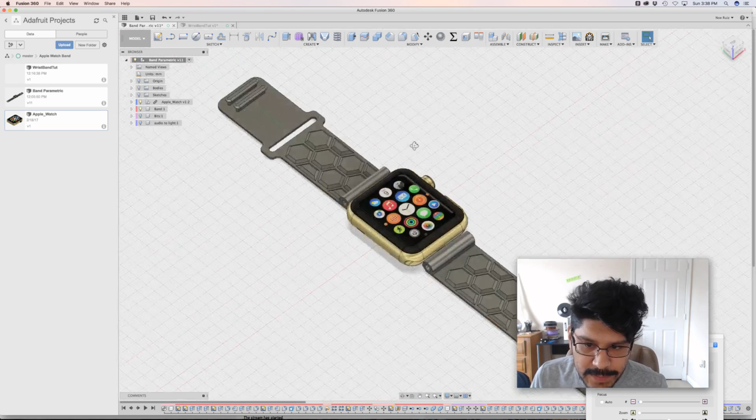So this is what I put together, and I made a couple different versions. I have this band and then this regular band. Oh, this is the one with the little holders for the audio adapter thing. But the main thing is that if I wanted to change, let's flip this out.

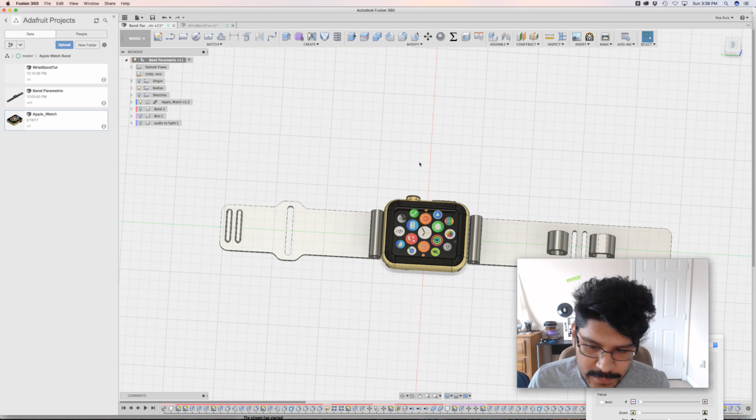If I wanted to change the overall dimensions of it, or even the width of it, it's easy for me to do that. So I'm going to open up the user parameters window, and I have a couple of them here already made. I have the width of the band, so I could change this if I needed to, and everything kind of updates.

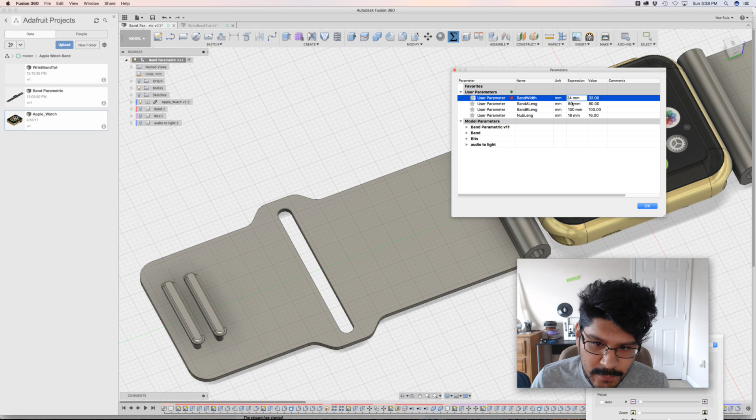If you notice, the nubs stayed, but the little opening for it opened up. So there's a really neat way to do this dynamically.

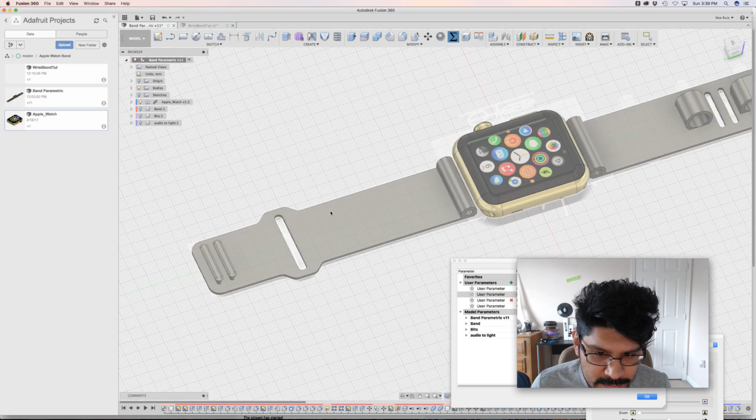The other thing is, I have two parameters set for band A and band B, or you can call it band 1 or band 2. So if I wanted to make this a little bit bigger, let's see if anything breaks. Nope. You can see that it stretched the band out, but it kept the two nubs here in the same distance between this little opening.

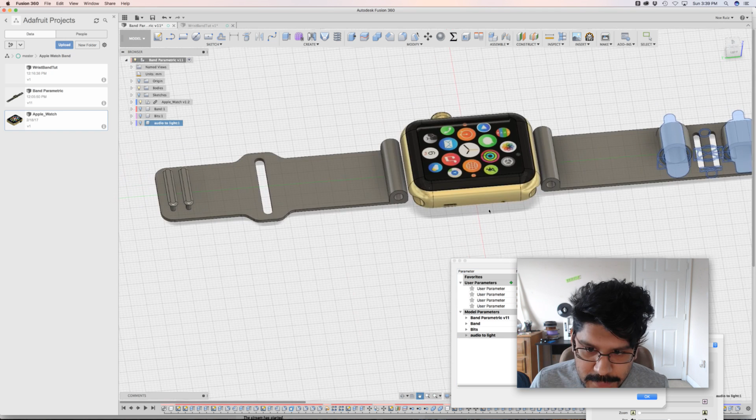So I'm going to show you guys how you can set that up. I think I messed that up. No, it's fine, that's really cool. And I also have it set for this one. This one might break though, because I don't think I added any user parameters for handling constraints on these two guys, so I'm probably not going to mess with that. But for now, this one works really well.

So I want to show you guys how you can build that using user parameters, but more importantly, understanding how constraints work. I've covered it in a couple projects, but it doesn't hurt to cover it again, especially with this project, which is more of a wearable and things like that.

So let's get started. First thing I want to say is that the actual Apple Band, or the Apple Watch thing, I actually found this on the gallery, the Fusion360 Gallery, which is a part of Autodesk's website. So if you go to gallery.autodesk.com/Fusion360, I'll link this below.

There's tons of files and designs that are available for people to check out. I'm kind of new to it, I haven't actually shared anything here yet. I think I'm going to start sharing. But if you're a Fusion360 user, you definitely want to check this site out. It's a lot like the Thingiverse or YouMagine or Pinshape, but these are all designs made in Fusion360.

Some of them are actually available to download. And what's cool about that is you can download this nice model and then take a look at how it was built by stepping through the design timeline. Really cool. You can rework it and use it in your projects, I suppose, depending on if there's any licenses or whatever.

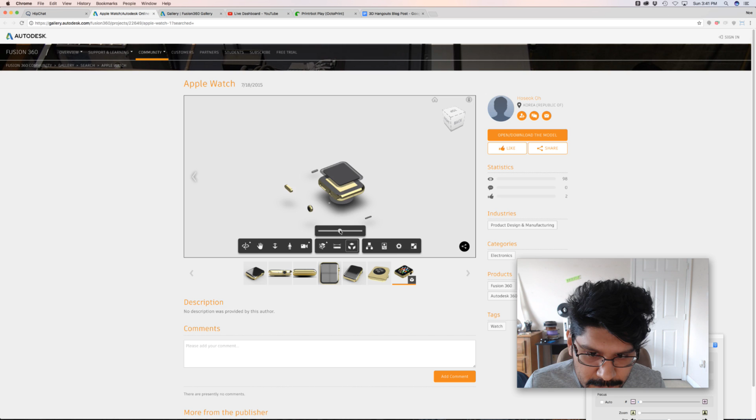This one was made by Hose from Korea, so shout out to you, sir, for making this. I didn't have to use that in the design, but it kind of helps to show it like this. Maybe you want to render it out or something like that. Really nice model, a lot more detail than I would have done, but if it's available out there and you want to use it in your project, check out the Fusion360 Gallery.

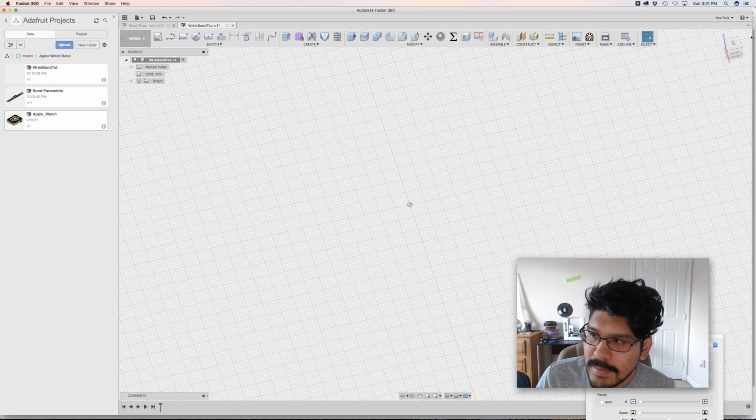So I have this new design file and I always want to save it out, make sure you're capturing the design history. You can right click on your main assembly in the browser and make sure you're capturing the design history.

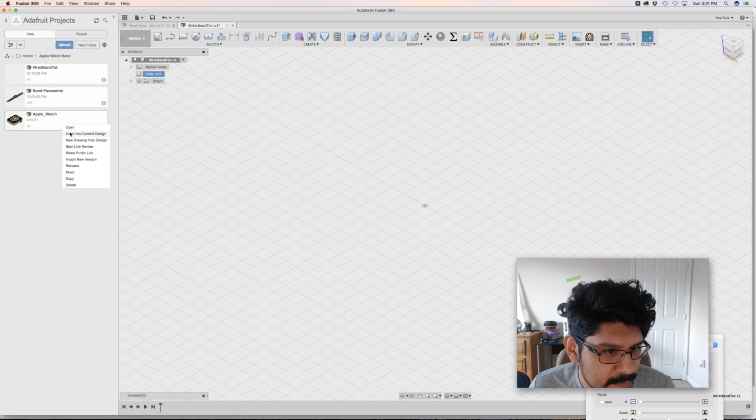And then you have your little timeline at the bottom, so always want to make sure you have that set up. Save it out and then you can import it. So I uploaded this to this project folder - it was a Fusion 360 archive, so now I'm just going to insert it into the document. It was designed for the center grid, so I don't have to really place it anywhere, it's already in a good spot.

So I'll start drawing out some stuff. Next thing I want to do is probably always make a new component for making stuff, so I'm going to call this wristband.

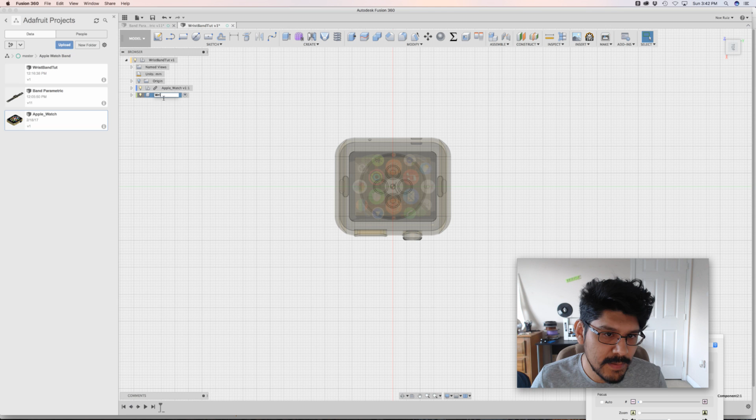Yeah, just wanted to make sure audio and stuff was working.

Okay, so now that I got that going on, I will start with some user parameters. It's under the modify window here, but I have it saved up here in the toolbar so I can quickly get to it. I already made some, so I'm going to delete these and remake them. The way you make them is you start off with this - there's nothing here yet. You can hit the little green plus sign, and then you can add your name to it. So this one's going to be band width.

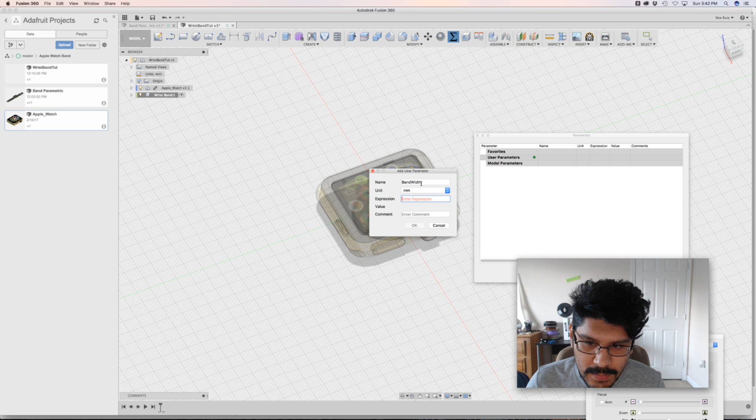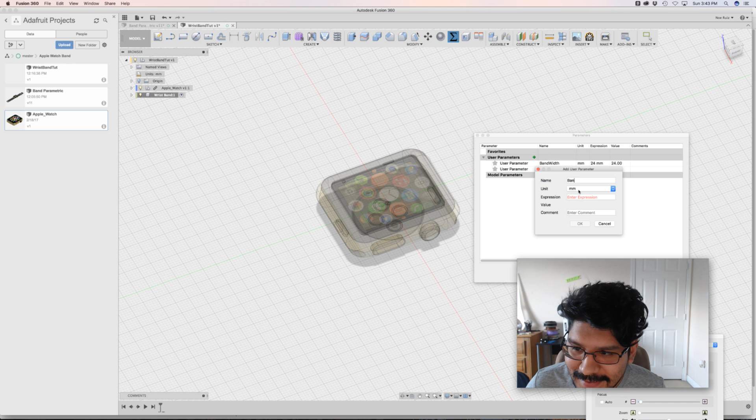And then we'll have to add something as the value, so I think 24, just like the other one. And then I'll make it like band A length. And then maybe just band A, give it a width or a length. Band B, and maybe the same. I found that there's always one band that's kind of longer than the other - they don't have to be, but that just seems to work for what I'm working on. All right, so now with those in place, I hit OK, and that's pretty much it.

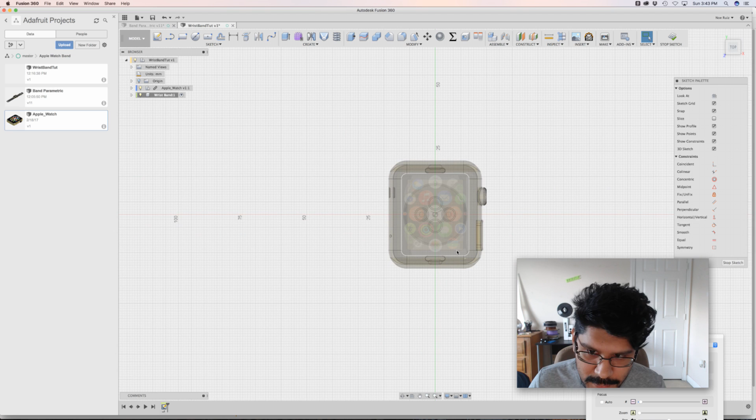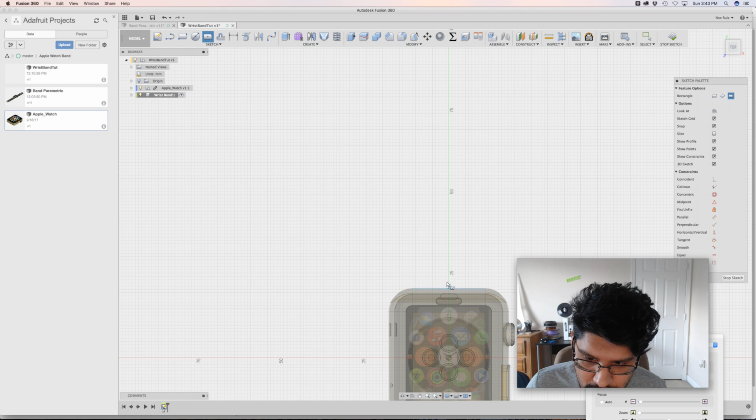Now I can reference them inside of sketches, so I'll make a new sketch, kind of draw in this area here. Fusion likes to reorient itself, which is okay, I suppose - I'll stick with this orientation. You can always use the view cube to navigate yourself wherever you want. I'm going to start with the center rectangle tool because it'll just work better when we adjust things later. So you always want to kind of work away from wherever you want to be - so if you want this to come out this way, just draw it outside here.

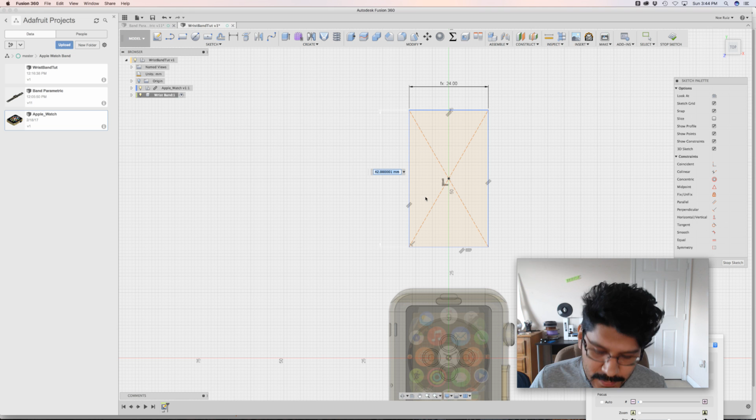So instead of putting a number, this is where I can start using the parameters, right? So I'm going to say band width, just hit enter. I kind of hit enter too fast, so I'm going to apply a sketch dimension here and call this band A. Hit enter. All right, so now it's made - I have my little square here, rectangle.

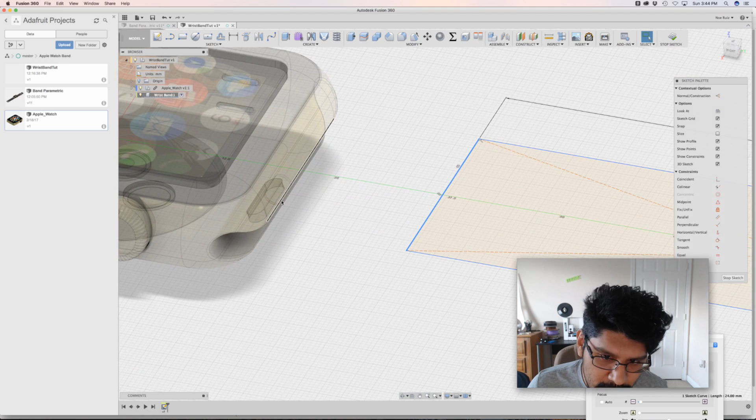If I want to move it, you have some degrees of freedom, right? And the main thing we want to do is kind of lock it so that this edge here is always connected to this area here. So no matter how I change it, I want to make this locked into this area. So the best way to do it that I found is to kind of project a feature into this sketch - so ideally this edge that I highlighted.

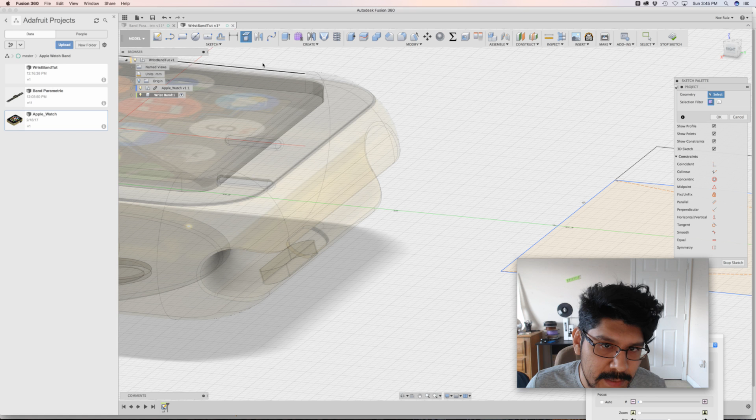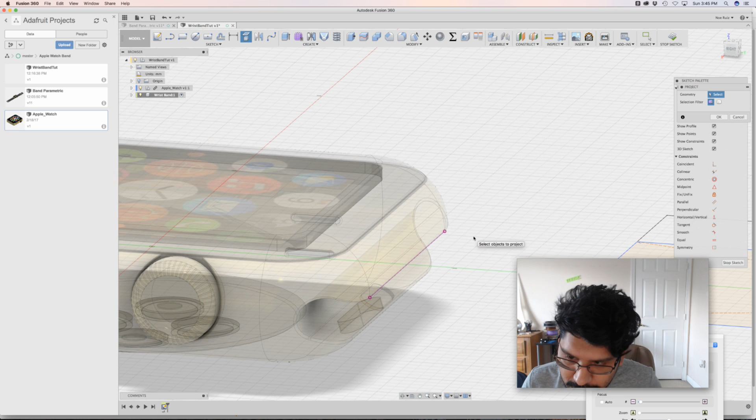So to do that, to project it in, I could just hit P on my keyboard, which is the hotkey for this guy over here under Sketch Project. I can just select one of these edges now - really doesn't matter which one it is, as long as it's referencing one of the edges that makes sense to you. In this case, it's this one here, so I can click on that. It makes it a little purple thing - that purple color should give you a hint that it is not something that you can adjust. If I were ever to move the Apple Watch, this sketch would go with it because it's referenced to it.

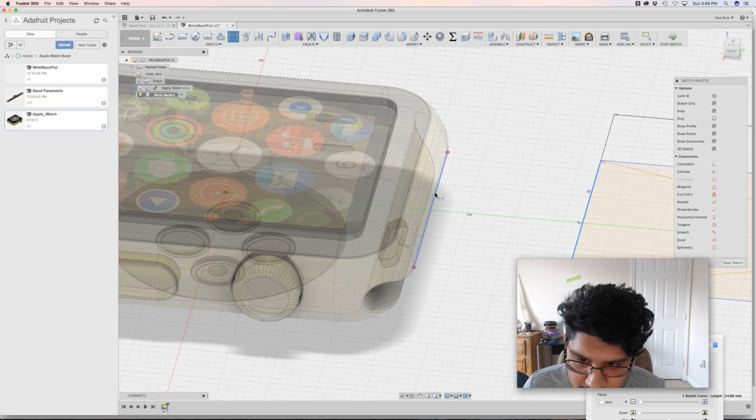So now what I can do is one of two things - I could either use a coincident constraint to say this line should always be over here, or I can use a sketch dimension, which I'm going to do. I can say I want this edge to be a certain distance from that edge. Right now it's set to 15, but maybe we want it to be 1. So now that's locked in place.

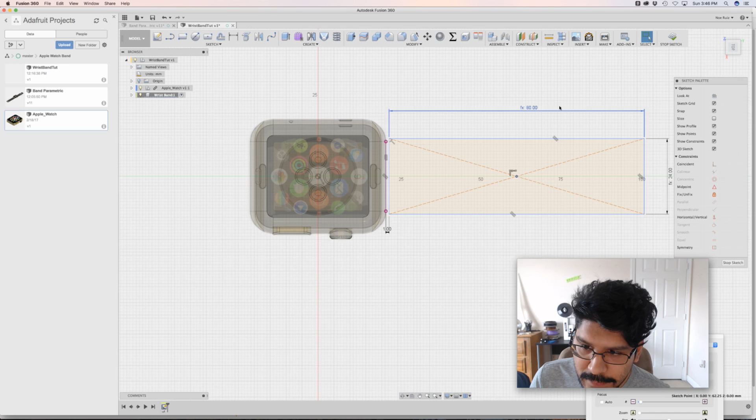If I can't move it on the Y, I can move it on the X, but not the Y, so I have it locked in there, which is kind of what I want, right? So now if I ever change the band A width, or length rather, if I change this, you'll notice that it stays in place over here, but this kind of grows.

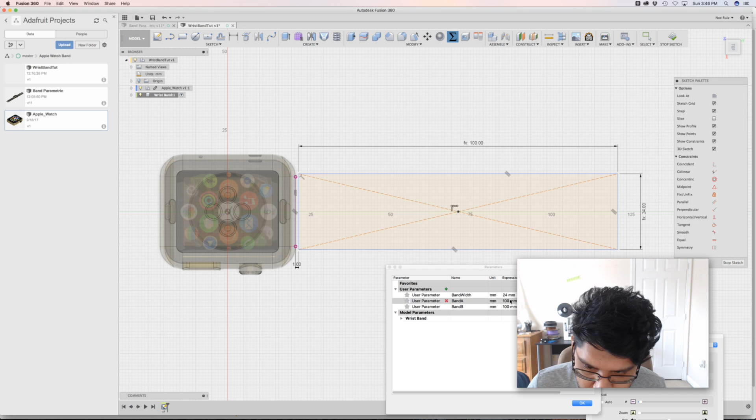If I didn't have this constraint set over here, then it would just kind of move freely without any constraints. So I'll put this back to 80.

The next thing I'm going to do is make the nub type thing, which is going to be over here. So I'm going to hit OK. So I'm going to make that nub, and I'm going to use a center rectangle again, this guy over here. And it's going to be somewhere here. I want it to be in the center, so I'll just kind of use that center.

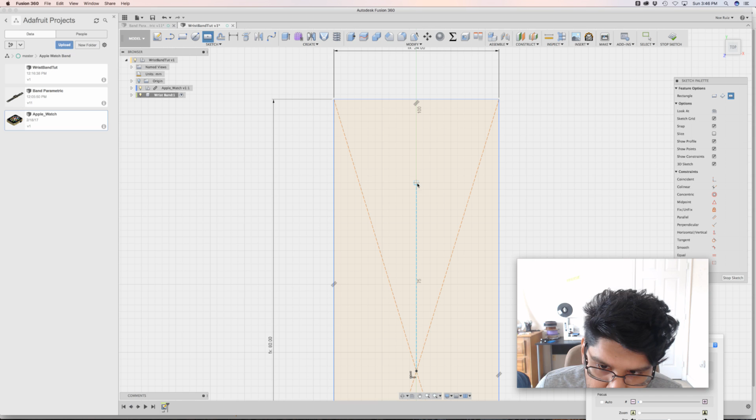Whenever you see these dotted lines that are blue, that's telling you that it's referencing another sketch. In this case, it's a point. So you can see that it's like, hey, that's referencing that. And it doesn't matter right now where I do it as long as it's in the center here on this y-axis. So I'm going to click here.

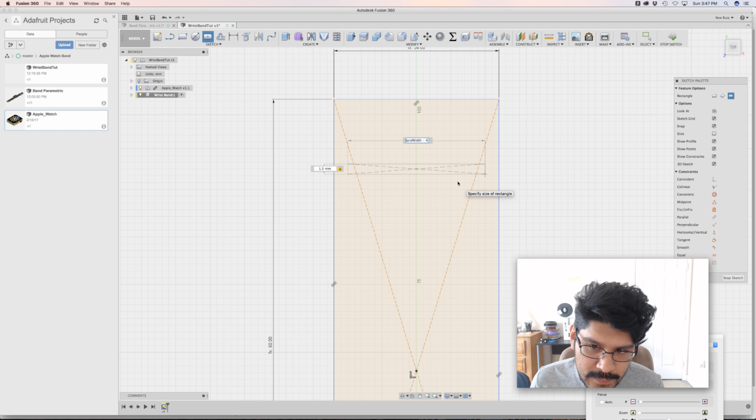And instead of adding a value for the width, I'm going to put 1.5 for the height of it, but for the length of it, I'm actually going to say band width, but minus like 3 or 4 millimeters, probably 4 millimeters. So what you can do here is a little bit of math and say I want to subtract 4 millimeters from the bandwidth, whatever that value is. In this case, it's 24, so it makes it 20.

You know that your sketch dimension is using a parameter when there's a little fx on it. That's like a little flag to say, but whatever. All right, so now I have that.

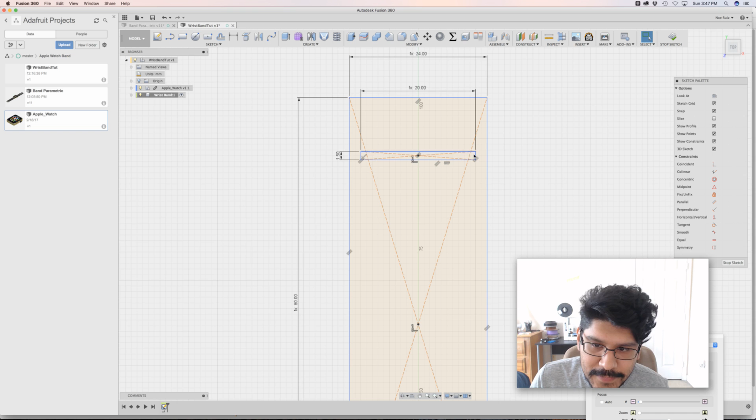The next thing I'll do is make another sketch dimension saying that the center of this little point here, which is our nub, should always be a certain distance from this guy here, the edge of the band. So I can click on those two, and right now it's set to 10, so I'm going to make this, or 10.25, I'm going to make it 10 exact. So now I have those two features.

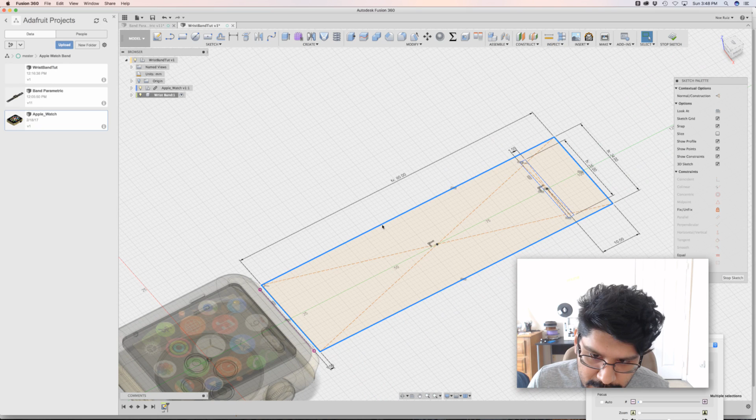I got the main rectangle here, and then this little nub rectangle here.

So I always like to kind of make sure that things are working by always kind of changing and making sure that the constraints are set. Let me open that again. I think I clicked something wrong.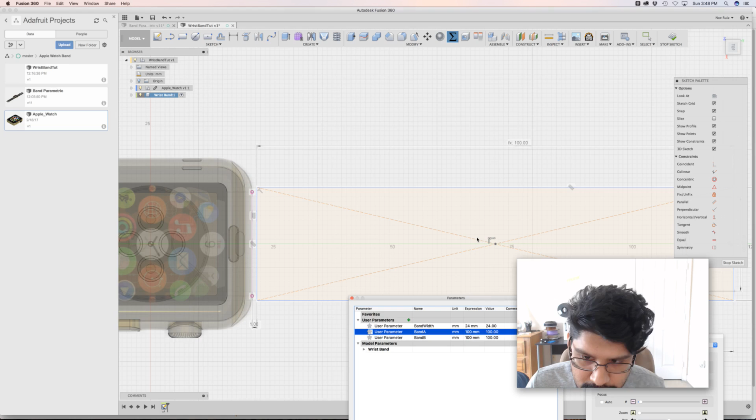So if I were to update the band A version and make this 100, you can see what it's changing and if things are working or not. So this is still 10. This is working okay. Nothing is broken. It's still kind of constrained to this area over here on the watch band or on the watch device itself. So that's working really well. So I hit OK. So this is enough to kind of work with to start extruding.

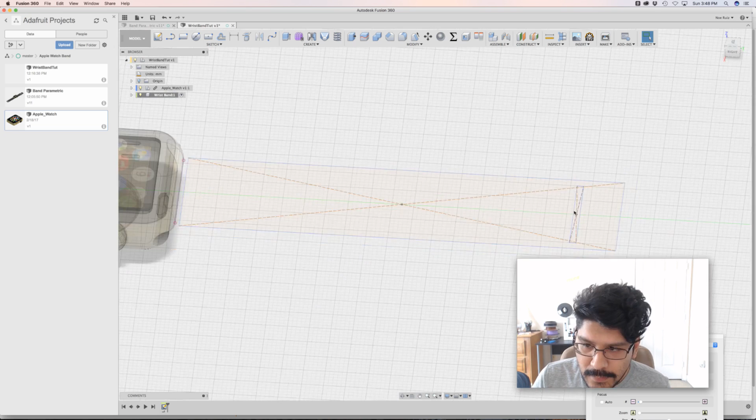So what I'll do next is just kind of extrude this out and select this area too, because it's going to be a nub, and then just put like -1. I'm going to extrude it downwards just so that I can extrude stuff upwards and not have to worry about adding things to it. So I hit OK.

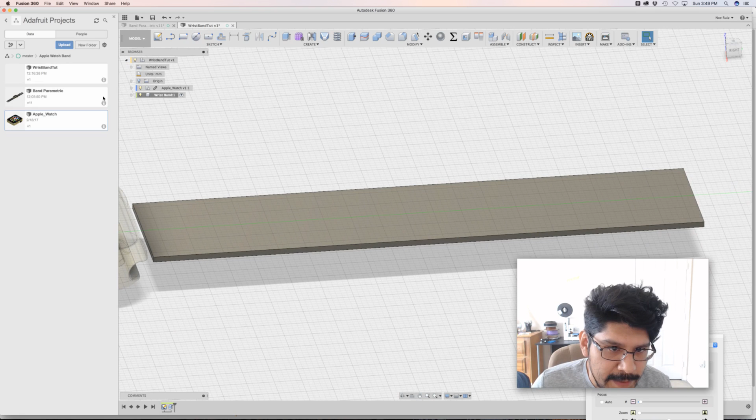The next thing I'll do is I'll bring back the sketch and go ahead and give it a name, like band A. Open that because Fusion likes to hide it as soon as you extrude it, which makes sense, but sometimes maybe you don't want to do that. So I'm going to click on that profile and extrude it up by like 2 millimeters, which is okay.

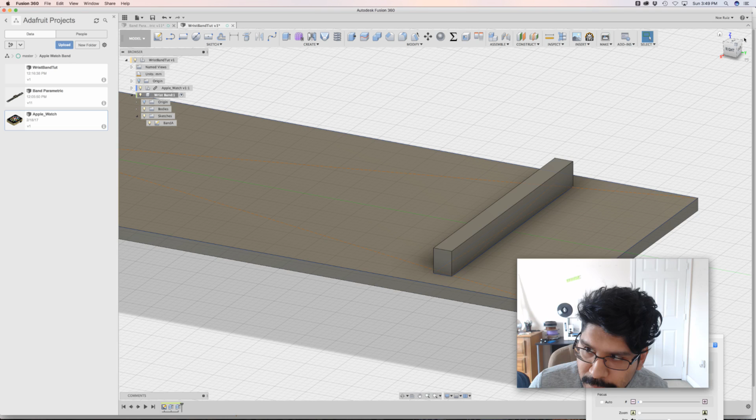And then the next thing I'll do is I want to make an offset here, but before I do that, I'm going to go ahead and make some fillets because those fillets will carry over into the projected sketch that I'll do. So I'm going to hit F on my keyboard, do a marquee selection over here so it selects all 4 corners easily, and then I'll put 1.5 divided by 2 because that's what it is. You can do a little bit of math there, and that gives you a nice rounded edge here, perfect radius.

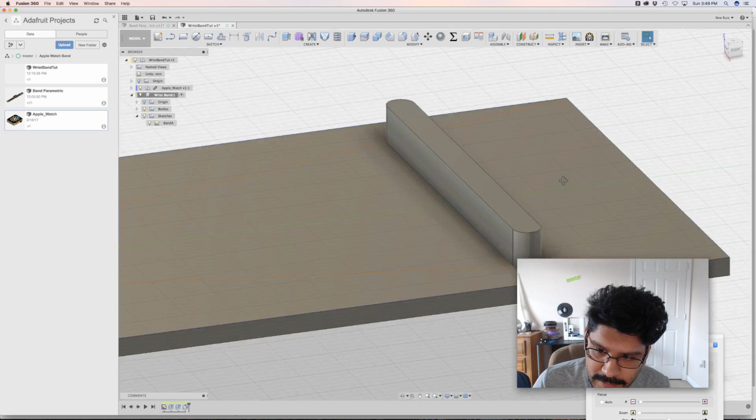So that's cool. So now I want to draw on top of this surface here. So to do that, I have it selected. I just clicked on it. It's blue, and I can hit P on my keyboard, and Fusion will automatically create a new sketch.

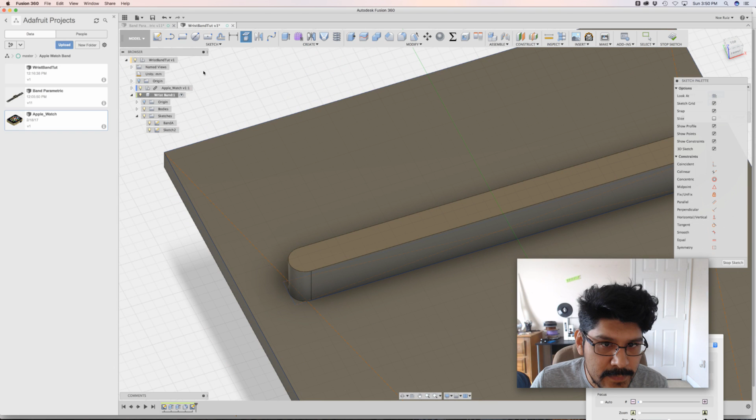I'll name it later since I can't seem to name it now. I'll do an offset by using the under sketch. You can use offset, or you can use the hotkey O, which I found very fast and useful. I'll do an offset of 0.75 of a millimeter.

And now I can extrude this out. I'll hit E on my keyboard to quickly extrude this out. I'll extrude this out by, I think it's 1 millimeter, or maybe 2.

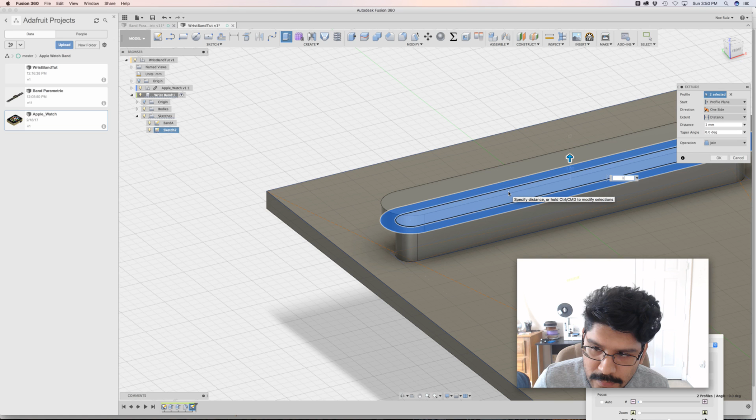Let's try 2 millimeters for now. I've got some overhanging issues here, obviously, so we can clear that out with a chamfer. I'll use the model sketch toolbox by hitting the hotkey S and then just type in 'cham' for chamfer, hit enter to select that.

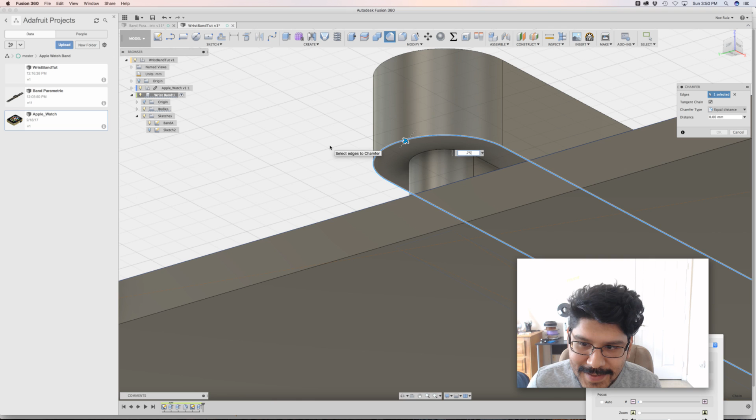Click on the edge I want to chamferize and put 0.75, okay. And then I'll even round this off here with a fillet. So F on my keyboard, click on that, maybe make it 1. So there we go - now we've got this cool nub here.

Very nice nub. So now let's see if I update this, the overall length of this band. If I change that, let's change it to 80. Things just move with it, right?

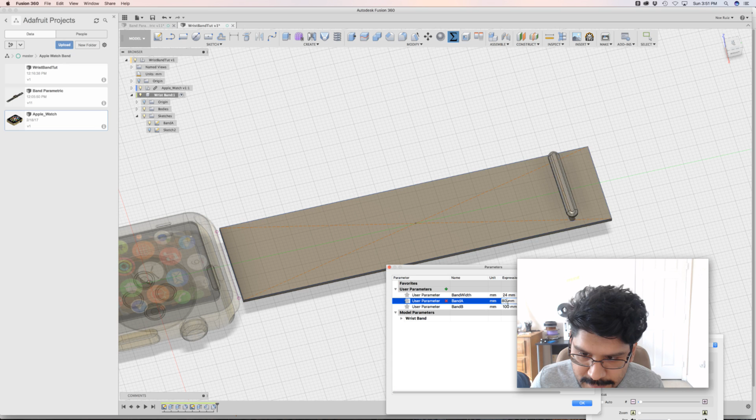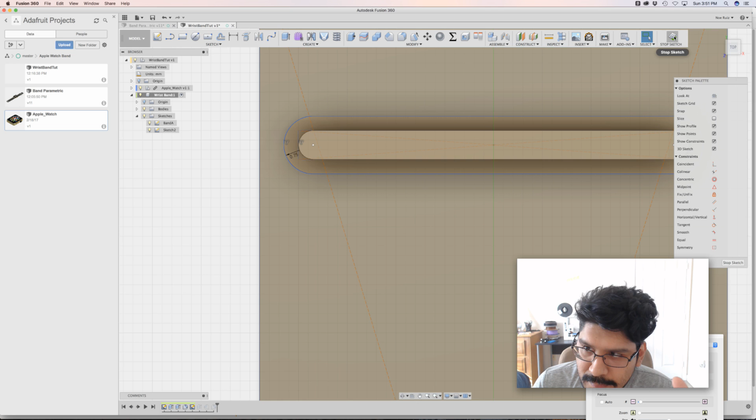Fusion's smart enough to update those features because when I drew on top of it, I projected it. So this sketch right here is referencing that surface, the one where we offsetted. When you start sketching on top of existing geometries, it's really smart to do that, because whenever you update something, the features will just carry over to it.

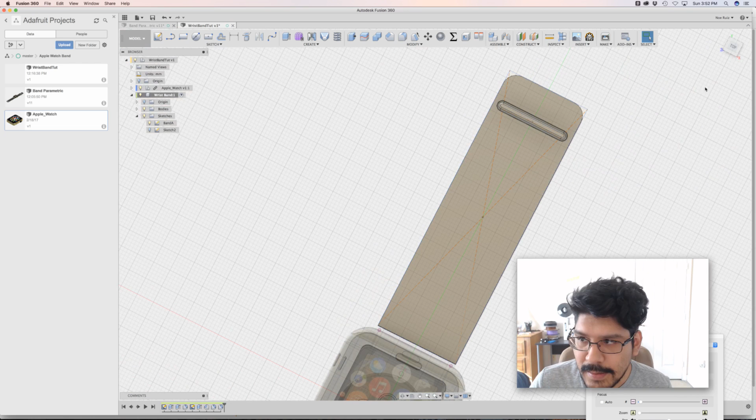The next thing I'll do is just some aesthetic stuff - add some fillets here, maybe like 4. So that's nice. The next thing I'm going to do is make sort of an opening for the other band to come into.

So I kind of need to make one over here. Instead of drawing another sketch, I'm actually just going to go back into band A's sketch and add to this existing sketch because I find it a little bit easier. I'll go ahead and use the center rectangle tool again, which is up here under sketch, or you can bring it up with the model sketch toolbox.

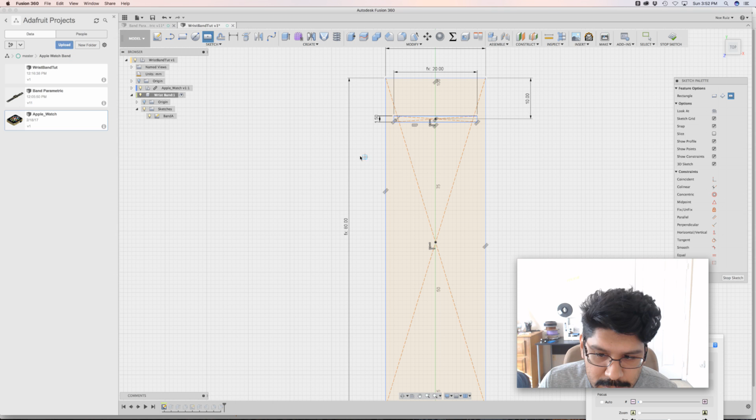But I'm just going to do it over here. I kind of want this to be outside - the hole needs to be a little bit bigger than the actual width of the band. So I'm going to do something like 8 for the height, and then for the width I'm going to say band width plus 4, or maybe even plus 5.

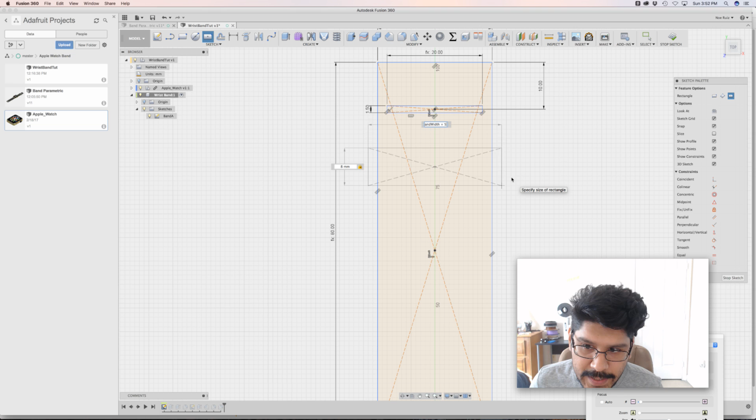I think that'll be okay. That way, when I create that cutout, I'll have enough room to insert that second band in here, because I want band A and band B to be the same width. So to make that hole, what I'll do is just do an offset, using the hotkey O.

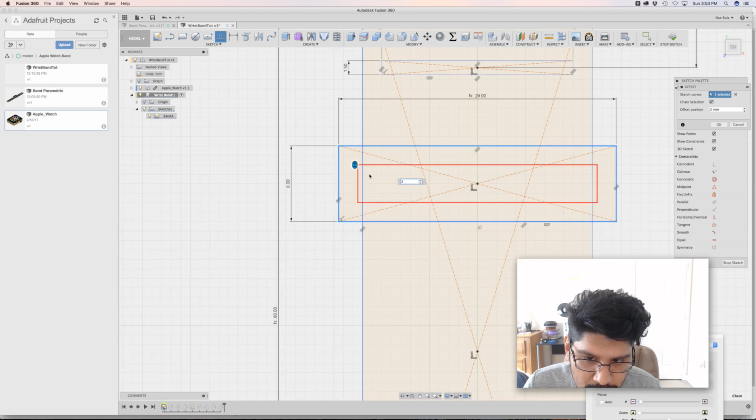Offset this to, let's say, 2 millimeters. You do want to have a little bit more area open, just so that you have some clearance and wiggle room for the other band to get inserted into. I'll hit OK, and that's it for that. I'll hit stop sketch.

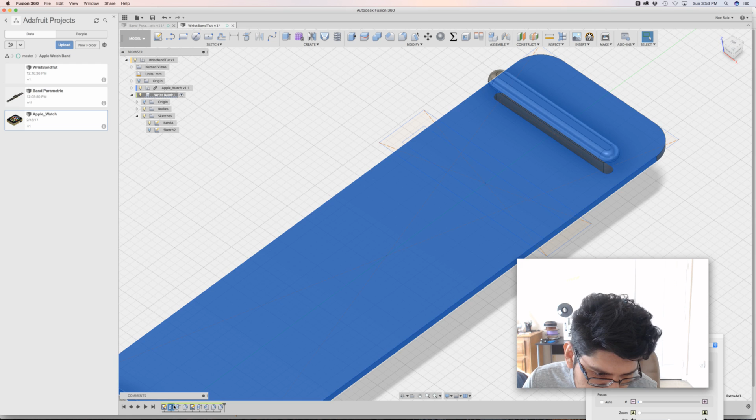And instead of extruding this out again, I'm actually just going to modify the existing extrusion - this very first one up here in the bottom timeline. I'll double click on that, and then I will just click. I'm not going to hold down shift.

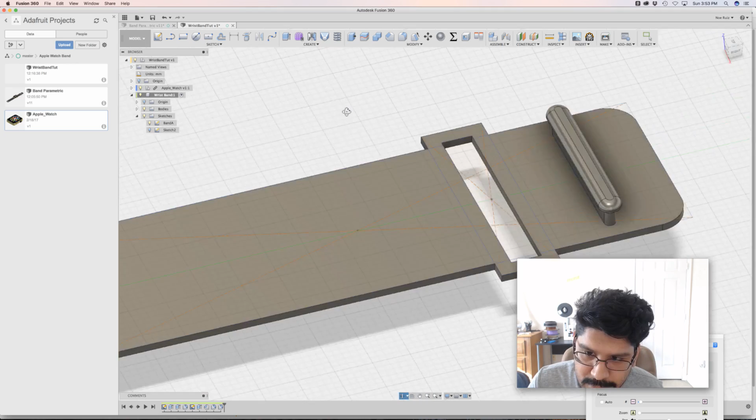You don't have to hold down shift, just click and you can add to your profiles. I can click on the center one to create that kind of void, that hole. I'll hit OK, and now when I hit OK, everything gets brought back to the front of the timeline, to our current state.

And now we have this kind of opening - it's a little bit too big. Maybe we can modify that. We'd go back into band A and change this. If we wanted to make this more dynamic, you could probably make a new user parameter, but I haven't done so, so I really don't need to do that.

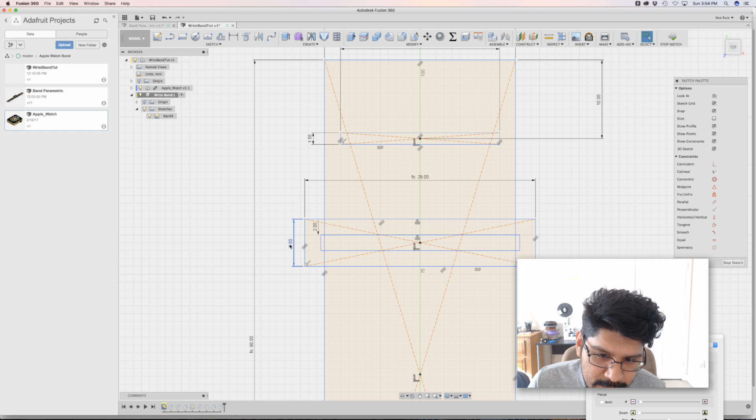Now, when I updated it from 8 to 6, you'll notice that it kind of moved on its own. It doesn't know where to move yet, so I need to set a constraint. I'm going to bring up the sketch dimension tool and say I want this center point of the rectangle to be a certain distance from the nub, or this edge over here, the edge of the band.

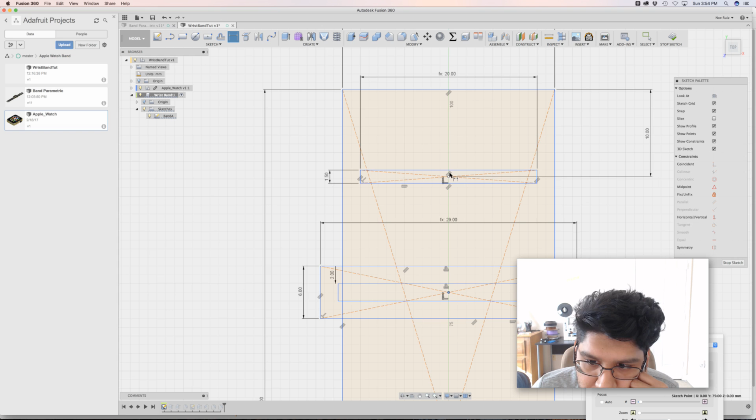I think I'm going to do the nub, probably over here. Let's do like 12, right? I think that'll be okay. So I'll hit stop sketch.

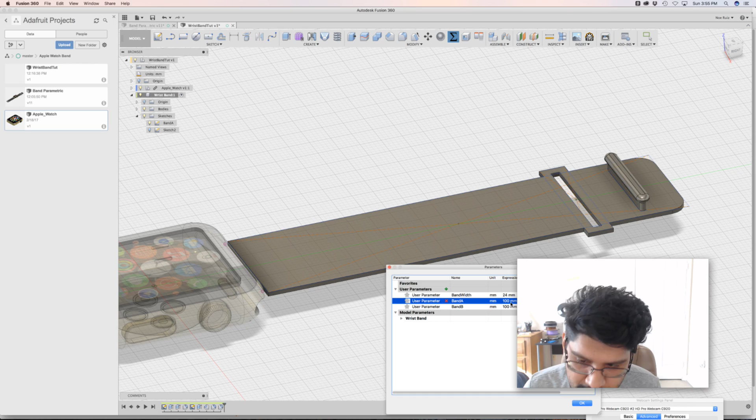So again, I always recommend checking your user parameters, updating them, and making sure that things are working the way you expect. I updated it from 80 to 100 millimeters, and nothing seems to have broken yet, so that looks pretty good.

So now I have this second area added. I'll change it back to 80. That looks good. Obviously, I can add some fillets and stuff, but it's kind of a waste of time for now.

The next thing I'm going to do is create that little holder area, or tunnel area, which will be on this area. Again, I'm not going to make a new sketch, I'm just going to modify it. I actually want to change the sketch name to nub. Sometimes you do need a new sketch, but in this case, I don't.

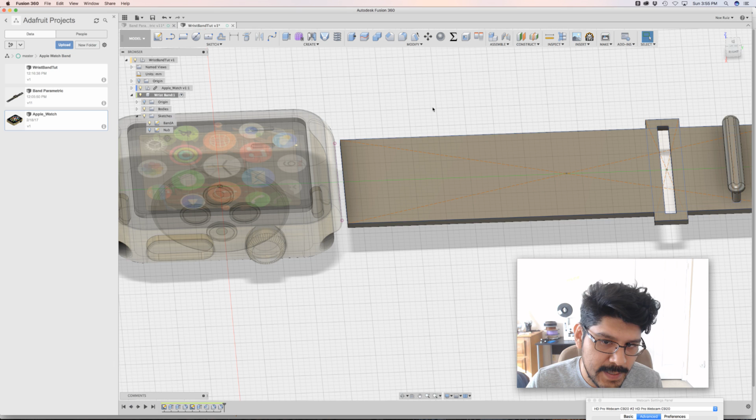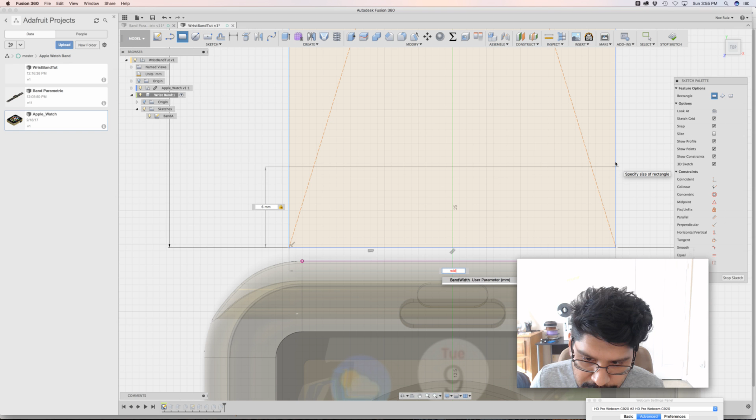I'm just going to go back into band A and make a rectangle over here starting on this corner. So I'll use R for rectangle, and click from here to over here. I'll make it 6 millimeters tall, and for this I'll just type in width, which is our user parameter for the band. Hit that, hit enter, hit OK.

That's kind of it. Now I can extrude this up. Select the profile, hit E on our keyboard. Let's make it 5 millimeters upways, and then we can do a fillet here on these two edges. 5 divided by 2, or 6 divided by 2, which is 3.

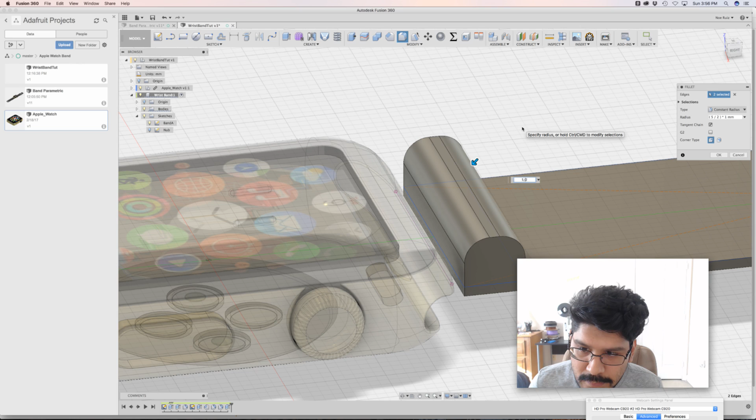Now that I have that, I need to punch a hole through here so that the little band connector can actually get inserted into this area. With that selected, I'll hit P on my keyboard. That makes a new sketch. I'll use the hotkey C for the circle tool.

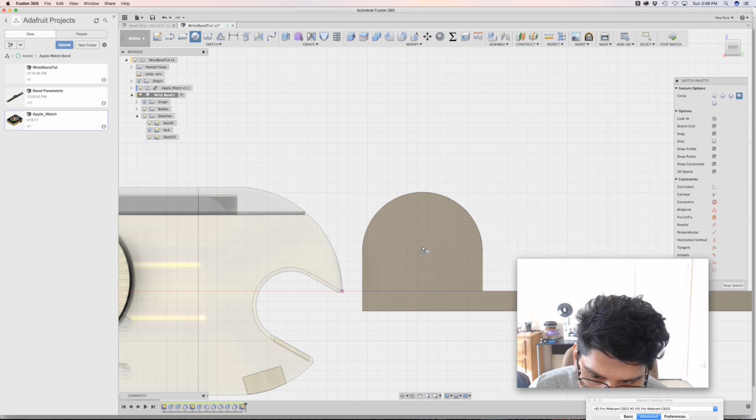Right away, when I rolled over, Fusion knows that that is the center. That circle there tells me that it is the center of that area. I'll make this 3 millimeters. You obviously want to measure the thing that's going to be inserted into this. And that's kind of it.

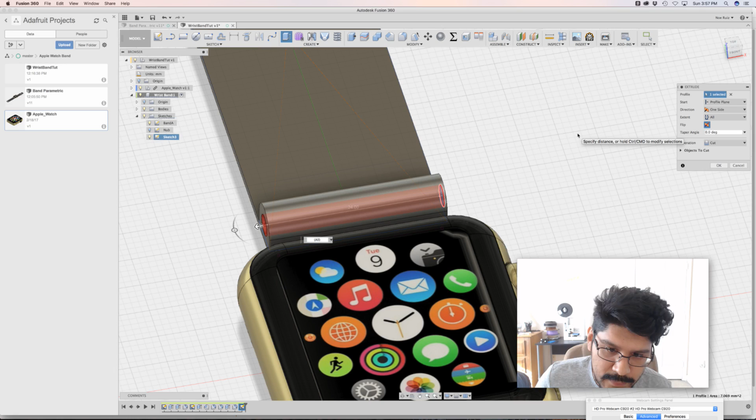Next, I'll pull this inward. You could also do the extent, change it from distance to object or all. In this case, I'm going to do all, which seems to work okay, which cuts through the whole thing. And that's our little guy there.

So now we got that. I mean, there is an overhang there, but because it's a circular overhang, most 3D printers can handle that okay.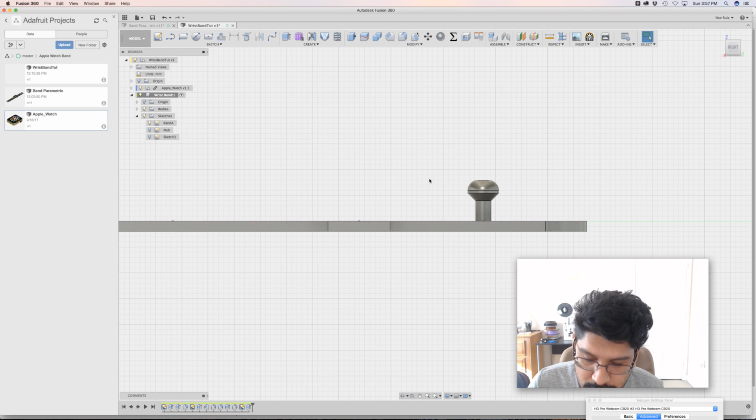The next thing I'll do is show you guys how I created 2 of these nubs in a quick way. The quickest way I found to do that is to just use a rectangular pattern. So I'll use the sketch toolbox and type in pattern. I got 3 patterns to choose from. I'm going to use the rectangular pattern.

Instead of selecting all these faces individually, I'll do a marquee selection. Click from here, drag, and let go. Now I have selected like, what, 17 faces? Yeah, that's a bunch of faces.

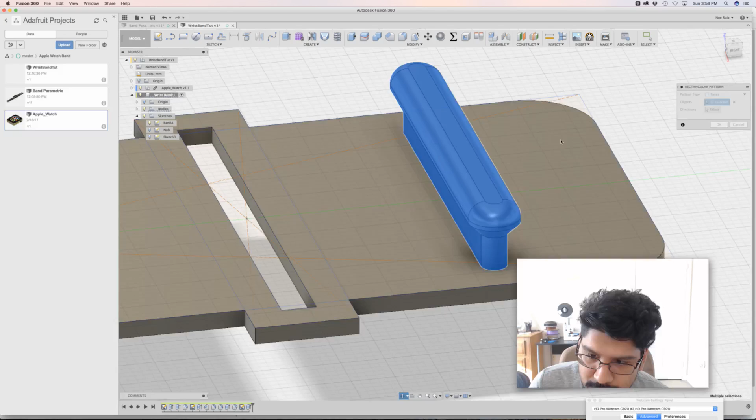The next thing I need to do is check the directions. I want to go on this direction. You have to select on an edge. It could be any edge, doesn't matter, as long as it's going in the direction that you want it to go. So I can drag this out.

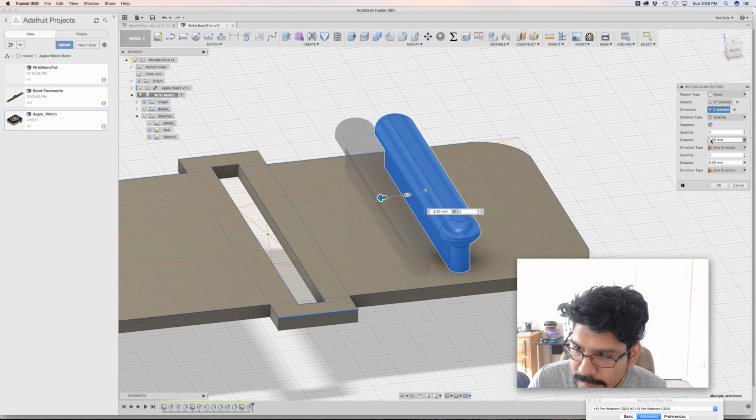I don't want 3 copies, I want 2, so I'll change that to 2. The distance type, I like to use spacing, and I'll make the distance 5 millimeters. So, okay, it automatically glues it to and attaches it to the existing geometry. That's what I want. If you didn't want that, I think there's an option for you to change that.

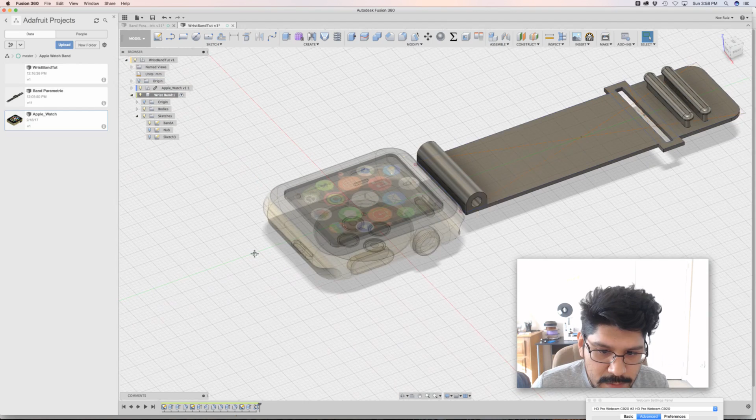So there you go. The next thing you would do is probably work on band B, but we really don't need to. You can use those same methods that I've been doing.

It's really about thinking about knowing when to use, adding features to an existing sketch. Like I have here, I've been adding just what I need. Whenever I make a new sketch, let's name this, I'd call this like hole or something.

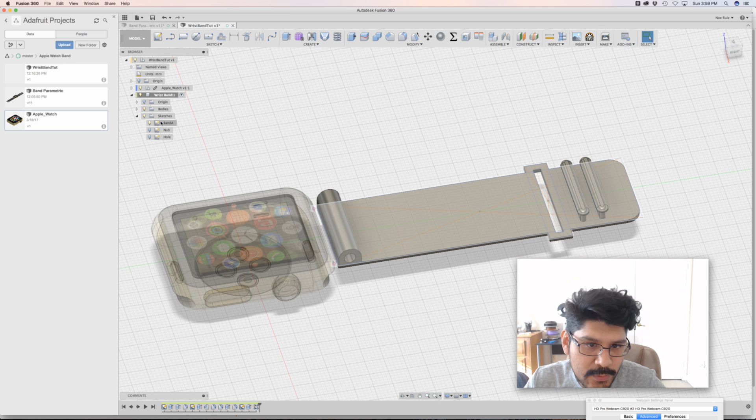You don't need to keep creating a bunch of sketches. Try to use as few sketches as you want. Obviously, you can get a little convoluted, so you don't want to have everything be in one sketch, but it makes sense to optimize it for the least amount of steps, I guess is one way to say it.

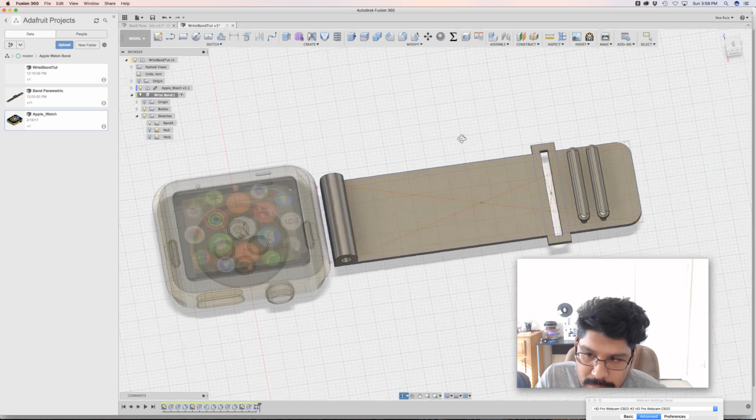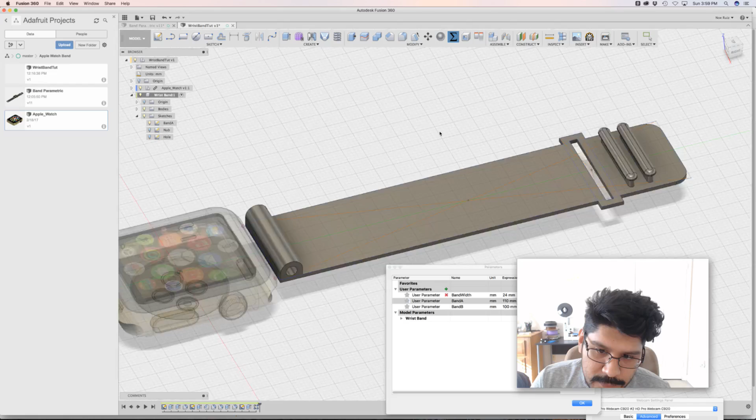At this point, we should probably check our work, see if this changes things. They kind of just adjust because we have constraints set. So knowing when to add constraints, knowing what features you want to be able to adjust and stay still, and what features you want to be able to stretch out. This is a really great project for user parameters.

I think that's pretty good, and that's about all I wanted to cover. Definitely let me know what you guys think, and if you have any tips, you can let me know and let others know too.

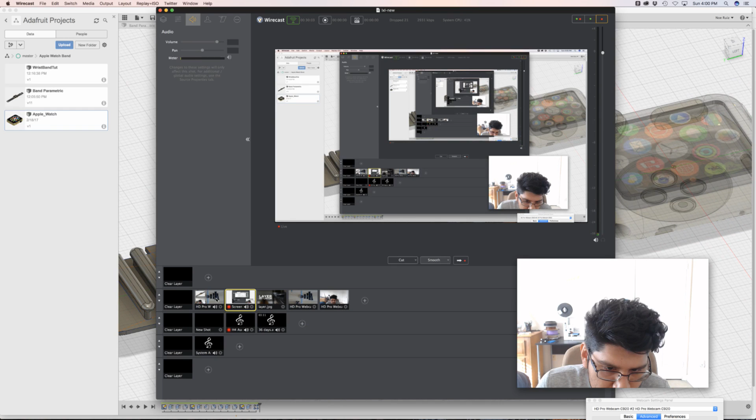Rito Strike is saying pattern on path should also work for this example. Yeah, you could totally do that. You could probably also use the copy, move copy command as well.

If anybody's wondering, Fusion360 is free to download for any hobbyists and makers. You can subscribe to a one-year licensing thing, which you can renew after your license is up. I did that recently and it worked really well.